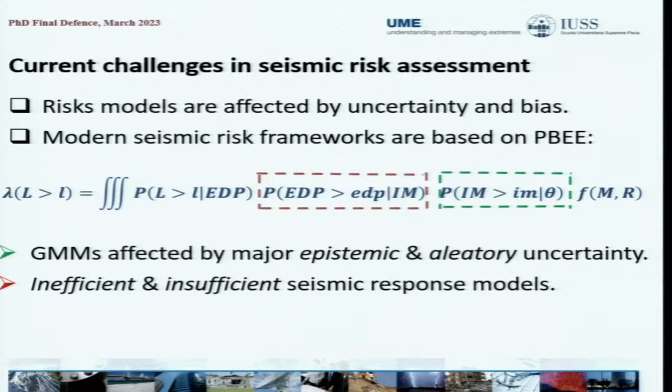To compare the observed with the estimated losses, and what we see here is a significant scatter. Now, modern seismic risk frameworks are based on performance-based earthquake engineering principles, which essentially use intermediate variables from the ground motion to the response in estimating the losses. However, in general, ground motion models are affected by major aleatory and epistemic uncertainty, and seismic response models, which are used within the vulnerability component, tend to be inefficient and insufficient.

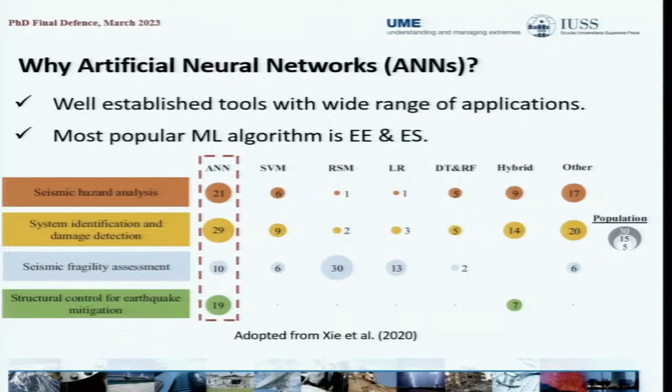Recently, data-driven machine learning models have shown promising advances in earthquake engineering and engineering seismology, as we can see from this study, in 4 main fields. The reason for this is that they can detect non-linear behavior in large data sets, and they are independent from predefined functional forms. Why did we choose neural networks? Because they are very well established tools with a wide range of applications, and according to the same study, they are the most popular tools in both earthquake engineering and engineering seismology. Moreover, they are not a black box, which means we can explicitly and precisely understand how they are trained and how they work, and we can express them in a mathematical form.

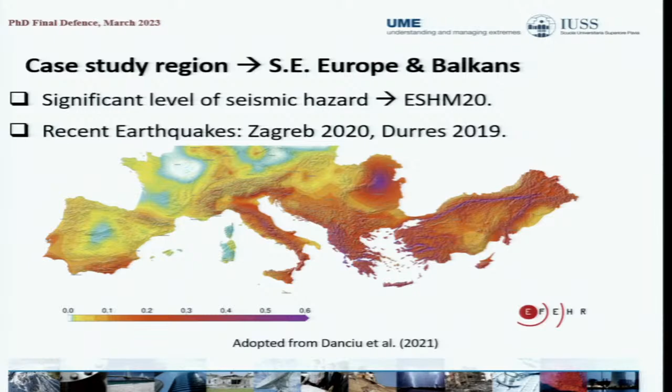Now, as a case study region, we are focusing on Southeastern Europe and mainly the Balkans, which is a region affected by significant levels of seismic hazard and, as a consequence, high levels of seismic risk. Allow us to ask the question: how can we improve existing methodologies in vulnerability modeling using neural networks? Traditionally, vulnerability models are scalar, which means they use one single intensity measure, and the most common case is the spectral acceleration at the fundamental period. Recently, advanced modern scalar intensity measures like average SA have shown some promising advances. However, there are still issues remaining, especially with sufficiency, which we will see soon.

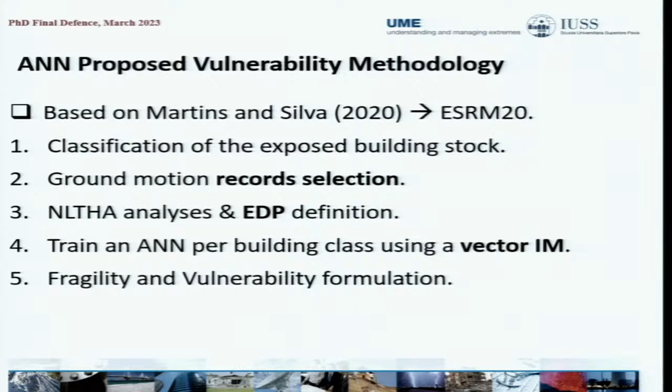Our proposed methodology is based on the methodology by Martins and Silva in 2020, which is also used by the recently published European seismic risk model, and can be summarized in these 5 steps, which we will go through one by one. In order to classify the building stock and estimate the structural capacity, we use directly the European exposure model, which classifies the building stock into building classes according to a set of common structural attributes and defines one median capacity curve.

Regarding ground motion selection, we used all of the strong records from the European strong motion database. However, we noticed there was a lack of very strong motions, which in typical vulnerability modeling studies is handled by scaling records to higher intensity conditioned on a single IM. In our case, since we are employing vector models, we couldn't scale because we are using many intensity measures. So for this reason, we used two subsets from the NGA West 2 and K-NET with very strong motions. Now, we performed non-linear time history analysis on single degree of freedom systems using VMTK and OpenSees, and as an EDP, we selected the maximum displacement.

Now, in order to train the networks, we set up 3 main goals, objectives if you will: to maximize efficiency, which is measured by the dispersion of the predicted response conditional on the IMs; to satisfy sufficiency, which is the conditional independence of other properties of ground motion like magnitude and distance; and finally, also make sure that we use intensity measures that can be predicted by existing ground motion models.

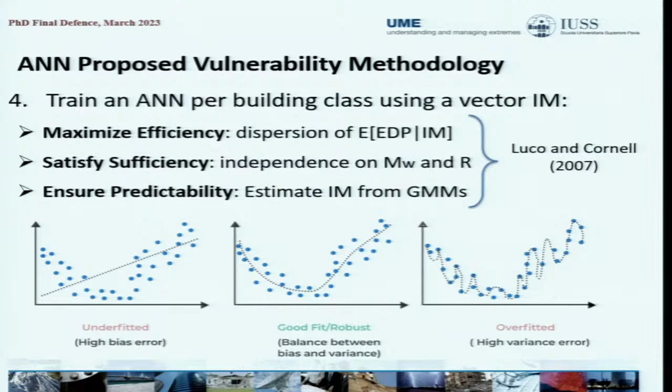Moreover, it is very important that we avoid overfitting and underfitting, which is a very common case for machine learning models, and aim for a good fit. In order to do this, we use the 10-fold cross validation, which essentially, for each building class, divides the entire dataset of intensity measures and EDPs into 10 equal subsets, and we train successively 10 neural networks using 9 folds for training and 1 fold for testing and assessing the model's performance on unseen data.

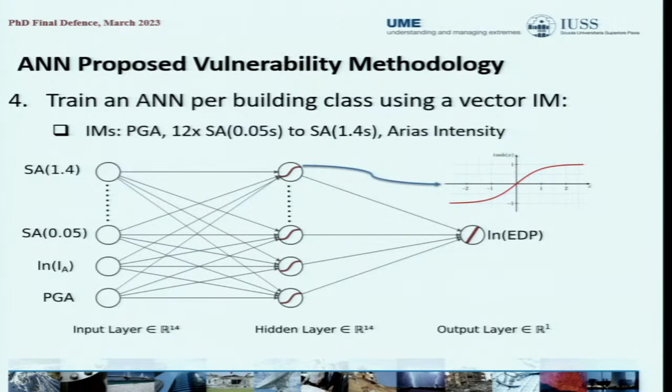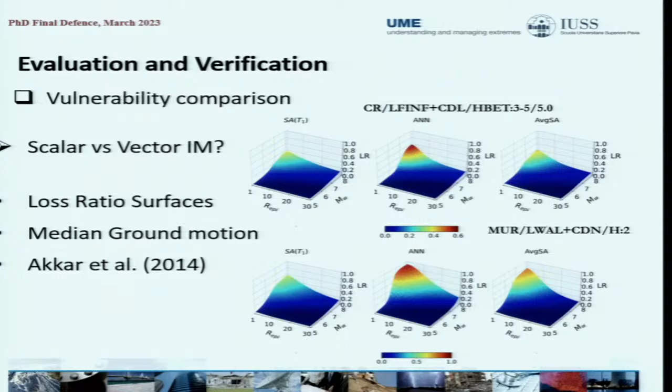In order to compare the variability between scalar and vector models, we employed loss ratio surfaces using the median ground motion from one ground motion model. And what we noticed is that in all cases, neural networks actually predicted higher loss ratio for combinations of high magnitude and short distance. And we can also verify this from these figures. The reason for this is that the scalar models, because they are less efficient, are affected by higher record-to-record variability, which tends to produce flatter fragility and vulnerability curves, which means underestimating the loss for high ground shaking and overestimating the loss for low ground shaking.

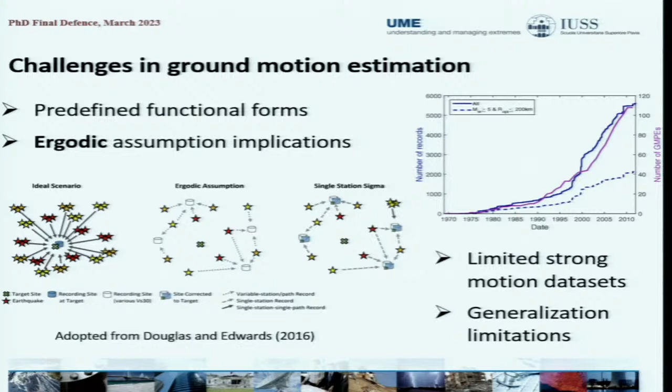Now, what about ground motion modeling and how can we employ neural networks? Traditionally, common ground motion models are developed using predefined functional forms on limited strong motion datasets. And these two facts, along with the ergodic assumption, have serious limitations and implications.

the mixed effects modeling approach, which is a very standard case when developing ground motion models. In this process, we have the fixed effect terms, which in our case is the median prediction by the neural network, and we have random effect terms representing the aleatory variability of the ground motion model, partitioned into three terms: between event, between site, and residual terms. We adapted actually a very recent algorithm for machine learning models that relies on likelihood maximization.

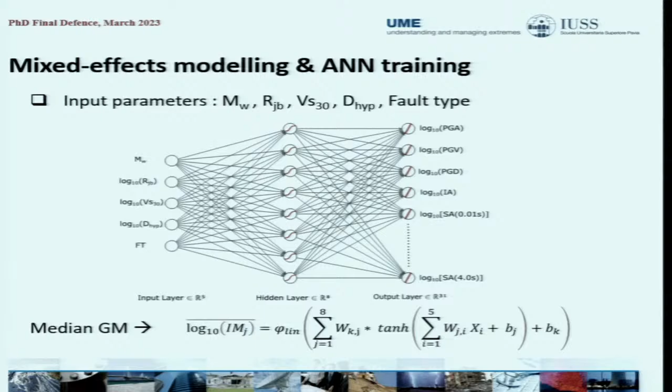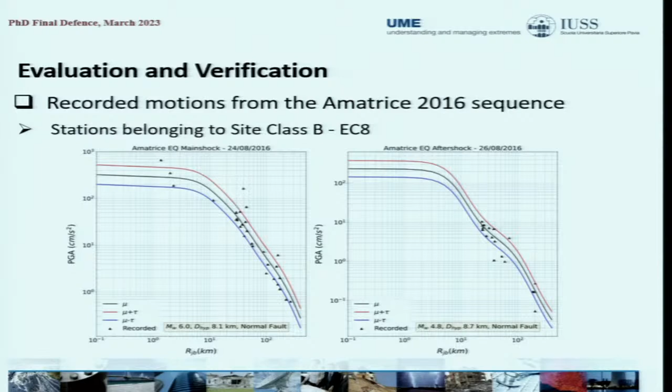Regarding the evaluation and the verification, allow us to use 2 very common intensity measures used in the vulnerability studies, SA03 and 1, representing low-rise and high-rise response of buildings. And what we can see is that the model is able to predict both in the entire range of seismic intensities with a very good accuracy. Now, we also compared the model's predictions with past seismic events that we have enough data. In this case, we see the median prediction of the model plus minus 1 between event-only standard deviation for the main shock and one aftershock in the 2016 Amatrice sequence, and overall we observe a very good fit.

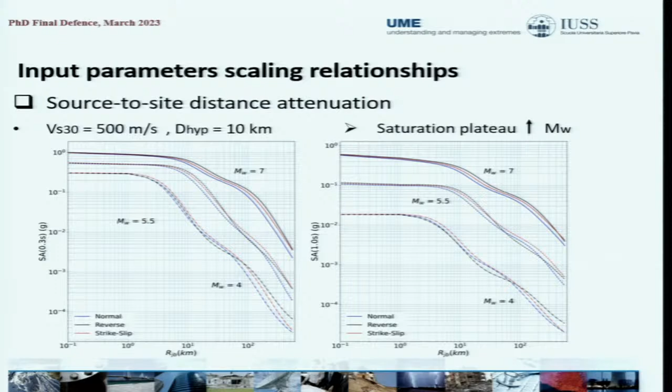Regarding the source-to-site distance attenuation, the model was able to capture that near-source ground motion saturates at shorter distances. And this saturation plateau increases with magnitude. Regarding the VS30 site amplification, there are two important things to note here: longer period spectral acceleration scales more with lower VS30, which is what we expected to see, and this scaling increases with distance.

Now, finally, we also studied the random effect terms and their associated variabilities and how they vary with structural period. There are two very important things here to note. First, we notice a significant between event variability, and this is a direct impact effect, if you will, of the ergodic assumption. And in our case, this is even more profound because of the high spatial distribution of events that we consider. And second, we noticed very similar trends with recently developed advanced ground motion models. The results of this chapter have been published in Bulletin of Earthquake Engineering.

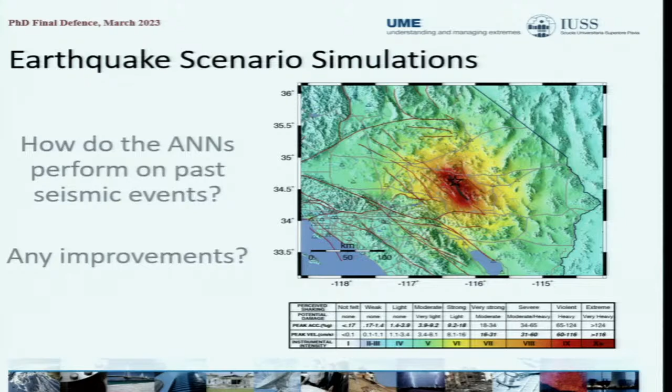Now, let's see how do the models perform on earthquake scenario simulations using damage and loss data from past events, and if we manage to have any improvements. We developed a seismic risk framework under which we defined 5 alternative modeling cases. Case A is using the USGS ShakeMaps to estimate the seismic demand, and using scalar fragility and vulnerability models directly adopted from the recent European seismic risk model. Case B, using GMPs, we consider 3

if the estimates are plus minus 25% of what was observed, overestimation higher than 25 and underestimation lower than 25. In our framework, we used certain components of the OpenQuake engine, specifically related to rupture modeling, and we used the exact same assumption for all events and all cases, 1,000 simulations for each event, and using the interperiod correlation model from Baker 2007.

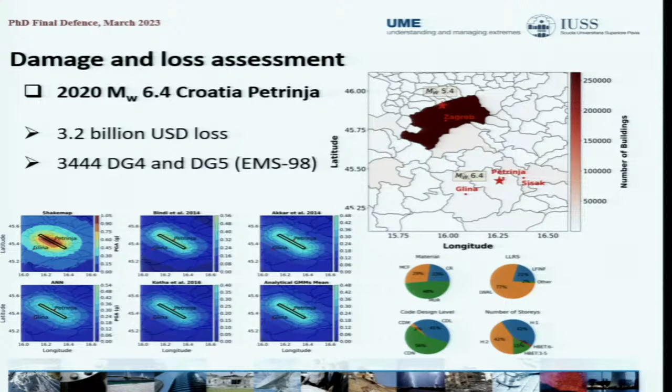The next event is another event in Croatia within the same year, in 2020, with magnitude 6.4. This event caused significantly higher ground shaking and around $3.2 billion losses. From the results of this event, we see a very clear trend that only modeling cases D and E, which employ the neural networks for the fragility and vulnerability components, were able to provide good estimates.

The next event is the magnitude 6 event that occurred in Athens in 1999, which at the time caused $3 billion losses. And in this case, we see the exact same trend that we saw from the previous event, that only cases D and E were able to provide better estimates, while the remaining cases in general overestimated the damage and loss.

Finally, we also considered one event that also occurred in Athens a few years ago that essentially did not cause any damage or loss, because it is important to assess the model's performance on such cases too. What we noticed here is that in general, most of the modeling cases significantly overestimated the damage and loss. Only 2 subcases from E that use the neural networks for the vulnerability were able to provide more reasonable estimates.

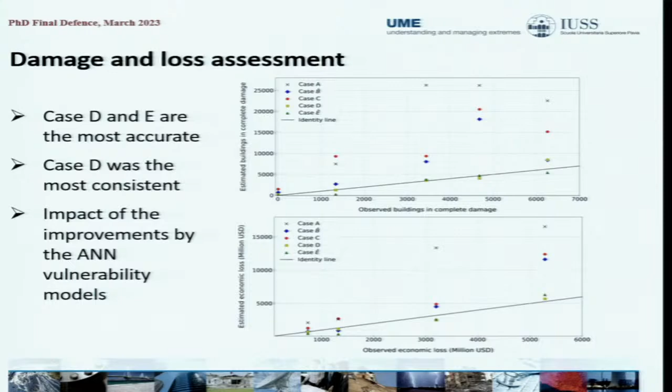Now, in order to summarize this, in these figures we see the 2 most important damage and loss metrics, which are the number of buildings in complete damage in the top figure and the total losses in the bottom figure. And what we see here is that cases D and E, which use the neural networks for fragility and vulnerability, were able to provide the best results, and specifically case D, which uses neural networks for both components, also for the ground motion.

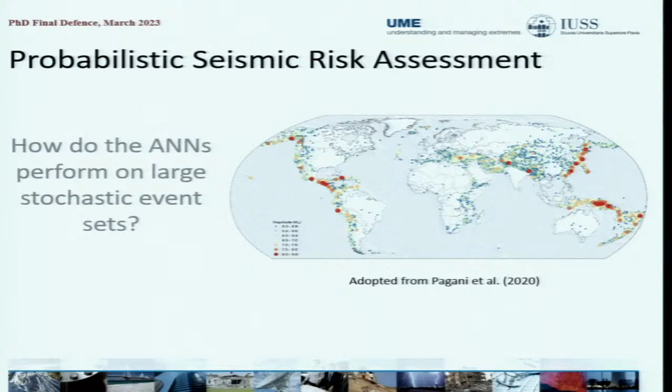Now, for the last part, let's see how the models perform on a large stochastic event set and carrying out probabilistic seismic risk assessment. The framework that was developed for the scenarios was extended to carry out event-based probabilistic seismic risk analysis, as you can see from this figure. The input data regarding the exposure, site, and source model were adopted directly from the European seismic risk model. And I have to mention that the generation of the stochastic event set was carried out in the OpenQuake engine and imported into our custom framework in order to estimate the damage and loss for each event.

Now, before we go into risk, we carried out the event-based PSHA for the cities of the highest exposure in the 3 countries of Albania, Croatia, and Greece. And we compared the results with the recent European seismic hazard model.

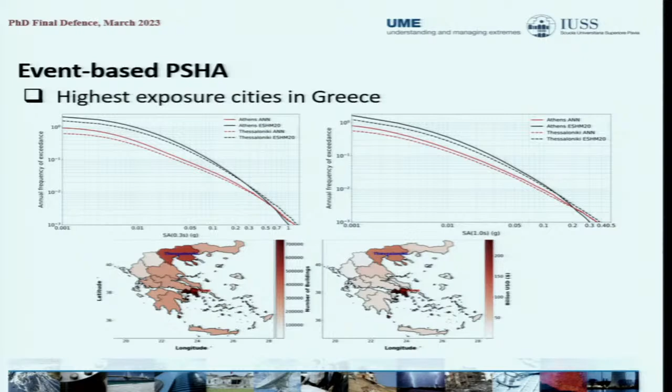What we noticed for the case of Albania and for the case of Croatia is that, in general, neural networks underestimated the hazard in the biggest cities of Zagreb, Split, Durrës, and Tirana. However, in the case of Greece, for moderate to low annual frequency of exceedances, what we notice is that the neural network predicted higher seismic hazard, and we will see very soon why.

Now, in terms of risk, of course, this difference that we observe in the hazard was also reflected here. We compare our results with the European seismic risk model in terms of average annual losses and loss exceedance curves. And in all cases, here for Albania and here for Croatia, we observe that the spatial distribution of losses is almost identical with the European model. There is in general a big underestimation of the losses. However, for the case of Greece, we notice that both models predict similar average annual losses.

And this holds for a big range of the loss exceedance curves. However, for intermediate to long return periods, the neural network framework predicts higher losses.

And in order to understand this, we investigated which events from the stochastic event set contributed more in this part of the return periods, and we noticed that there are events with magnitudes and depths outside of the range of the input parameters used to train the neural network ground motion model. And this should be highlighted: these models should never be used for scenarios and cases where they are outside of the data used to train the model.

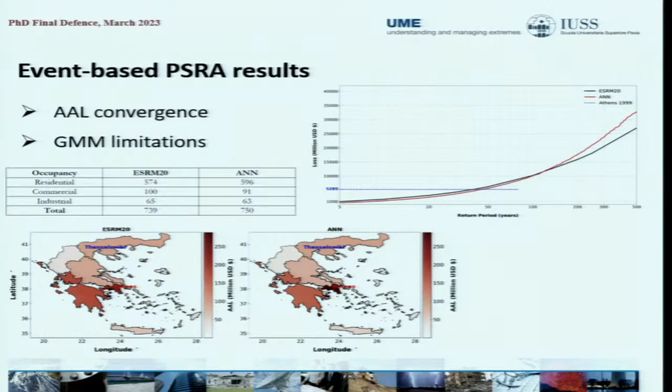Now, in order to summarize, in the vulnerability modeling, we noticed that neural networks are consistently sufficient in all cases and significantly more efficient than the scalar models. Although it is important to mention that average SA performed better than SA(T1). Neural networks were able to substantially reduce the bias and uncertainty in loss estimation. However, we should always keep in mind that scalar models have been calibrated and maintained for decades, and in order to start using neural networks, more work is required regarding validation and verification.

Now, regarding ground motion modeling, we noticed that our model was in very good agreement with past seismic events. And it is very important to note that the model was able to provide scaling and attenuation relationships which revealed physically sound trends, which is something very important. However, due to the high spatial distribution of considered events, we noticed a very high between-event variability, and this is a direct effect of the ergodic assumption. That's why future studies should focus on using neural network and machine learning models to develop fully or partially non-ergodic ground motion models.

Regarding the earthquake simulations, one important thing to mention that I did not mention before is that the selection of the ground motion model to estimate the seismic demand has a significant impact on the mean damage and loss metrics. It's something that has been observed by other studies, of course. The best performing cases were cases D and E, specifically case D, which both employ the neural networks for the vulnerability and fragility component, and case D also for the hazard estimation. And although neural networks were able to provide better mean estimates, we did not manage to reduce the major variability of the damage and loss estimate because this originates almost entirely from the aleatory uncertainty of the ground motion models.

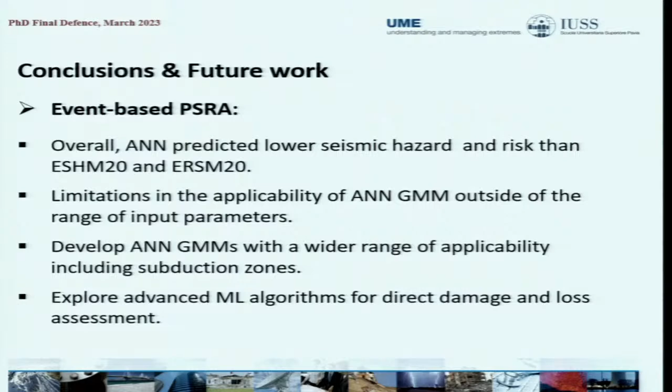And finally, we believe that it's very important that future work should also explore alternative and recent machine learning models for carrying out direct damage and loss assessment without the need of estimating ground motion fields. And we should never forget that all models are wrong, but some are useful.

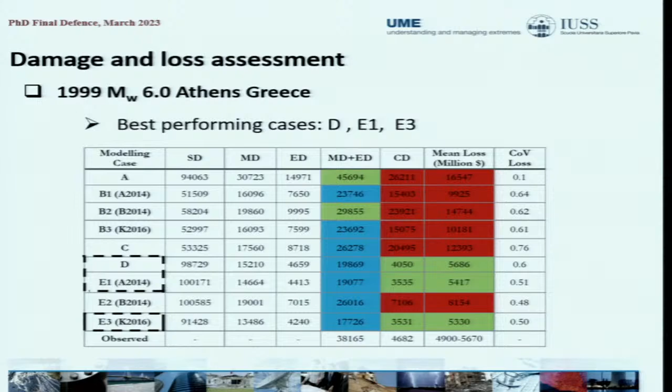Are there other questions from the committee? In view of structures, can you give me more details about the method to define the classes of buildings and how the criteria can change the reliability of the method?

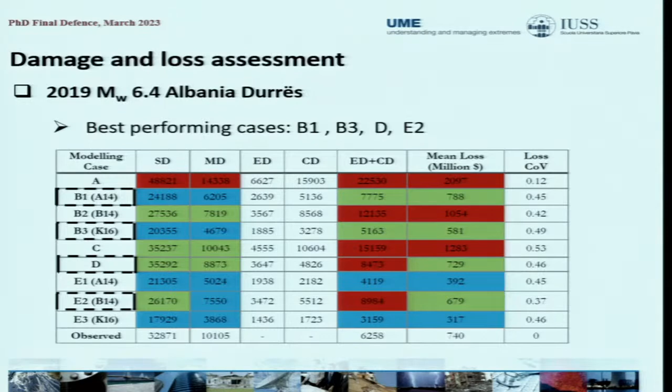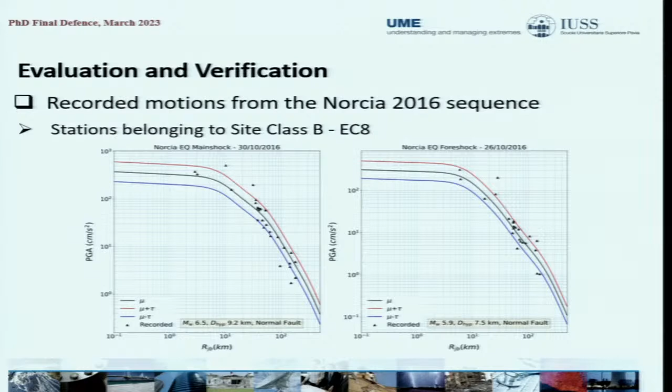We did not develop any building classes, we adopted directly the building classes and corresponding structural capacity models from the recently published European seismic risk model. As you can see, if I can manage to go very far back, for each building class, which is defined by a common set of structural attributes, the European seismic risk model using the GEM building taxonomy defines a median structural capacity curve. There are many slides, but essentially we did not provide any novelty within this thesis. We just used the most recently publicly available models. Thank you for your question.

Other questions? Fulvio. A question about the record selection, because you showed us that you also consider very small site-to-source distances. Did you also take into account pulse-like ground motions, or do you expect to include them in a future work?

Very good question. Well, I believe that if you want to estimate the risk of a single building or a single facility, this is very important. But in our case, as you can see here, we used more than 3,000 records in order to cover a very large region in the Balkans, considering so many building typologies. I'm not really sure how this would change the actual median and mean prediction of the vulnerability models. I think it is very important when you are interested in one facility, but I'm not really sure. Actually, I believe that it would not change how the neural networks train and develop. Thank you very much for the question.

Okay. Have time for that. Okay, we have a question. Maybe, because you need to grab the mic, Rui. We only have one.

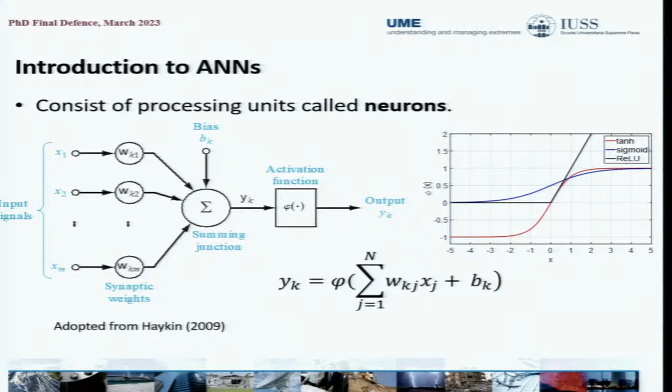They are trained very well. Actually, the reason we use them is that we can really understand how they are trained, and they are trained very efficiently using the backpropagation algorithm. Essentially, you do this training in many loops where you pass the data and have a loss function and a specific loss metric that you try to minimize using first and second order derivatives, but coming backwards, from the outputs back to the input parameters. I believe this is the main reason we use them: we can understand how they perform linearly, we know exactly when they do the nonlinear transformation, and we have tools in libraries to train them well with an established backpropagation algorithm.

I hope I answered both questions. Okay, thank you, Rudy. It has to be really, really quick, Enes, okay?

I have a quick question. Based on your experience with artificial neural networks, how hard or how much work would it be to consider spatial variability, cross correlation between different points on different sites, how ground motions are correlated? In addition, I saw that for considering correlation between different spectral accelerations at different periods, you use the model from Baker 2007 for both spatial correlation and cross correlation. Does it need a lot of work to implement this within your methodology? Thank you.

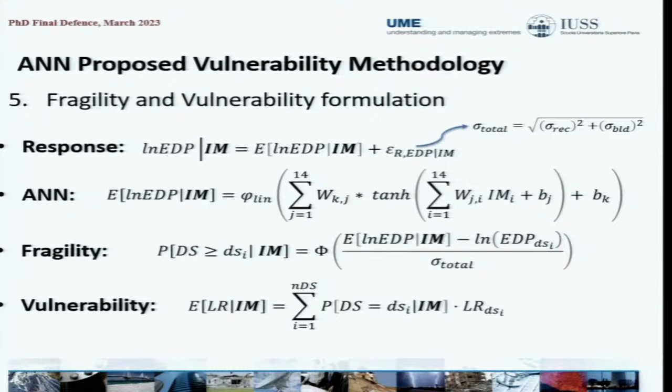Regarding the inter-period correlation, it does not increase the cost at all. Actually it's very easy to implement, and it does not increase the running time of the analysis. The problem comes when you want to include spatial cross correlation, because the neural networks we used here employ 14 intensity measures, so imagine the burden when you have more locations with buildings where you want to estimate damage and loss, and 14 intensity measures—this creates exponentially large cost. Compared to scalar models, this is one area where we notice some difficulties, but it can definitely be done. It's not a problem.

Yes. Well, thank you again, Petros. Thank you very much.

Move now to the next candidate, Derek Rodriguez Pacheco, who will be presenting us his work on developing a framework for the quantification of non-structural seismic performance factors. Derek is from Costa Rica.

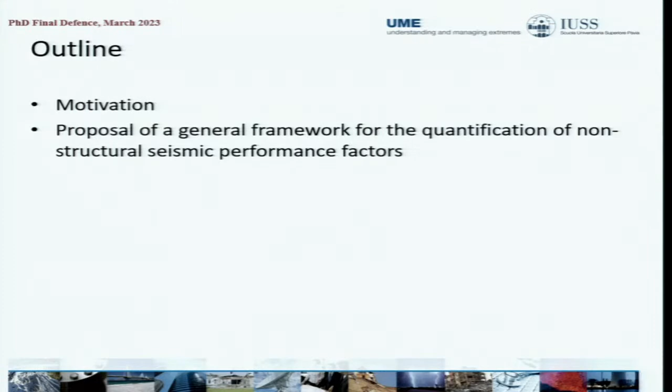Then, based on some literature review that we performed in the beginning, basically we did an initial proposal of a framework for the quantification of non-structural performance factors in order to try to find the research gaps that needed to be filled during this dissertation in order to more or less fulfill the idea we had in the beginning. Based on this initial proposal, 3 different topics were determined that needed to be further investigated. The first one corresponded on how to characterize the duration of floor motions.

Okay, I don't know. Quick. Okay, sorry for that.

So the first thing that we identified was to find a way to characterize the duration of floor accelerograms, because it was something that still was not investigated so far before we started working on this. The second one was how to estimate floor response spectra for large building populations, which also was a kind of a tricky topic that had not been very much looked into before we started. So we also developed some research in this area. And finally, the biggest gap to fill, in my opinion, was to find a way to simulate synthetic floor accelerograms in order to assess the performance of non-structural components.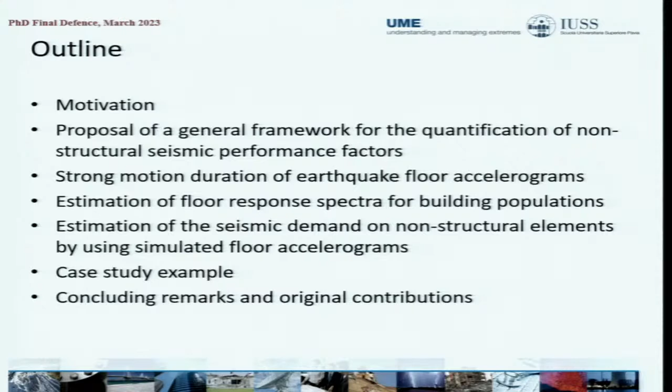After this, basically we implemented a case study example in which we encompassed all the investigation and all the research we conducted in order to demonstrate how the framework we proposed could be used eventually for the quantification of non-structural performance factors. And just to finish, I'm going to talk about the main contributions we think this dissertation provides to the current state of the art, and also the future work that can be done regarding this topic.

So, with respect to the motivation, basically, as many of you know here, non-structural components started to play a substantial role in our field, more or less, I would say, a couple of decades ago, as a consequence of mainly 2 things. The first one being the development of the performance-based earthquake engineering in the United States. And second of all, also because of the outcome of several seismic events that occurred in very densely populated areas which had strong code regulations.

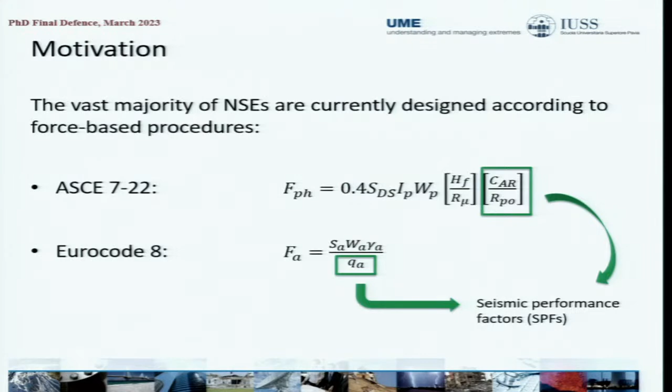So, nowadays, the vast majority of non-structural components are designed according to force-based design procedures, which basically use what are called the seismic performance factors in order to correlate non-structural behavior and non-linear behavior with elastic analyses that are typically used by practitioners around the world. For the case, for example, of the ASCE 7-22 in the United States, we have that the performance factors are the CAR and the Rpo, where in the Eurocode the famous behavior factor q is the corresponding seismic performance factor. Important to mention also that for the Norme Tecniche per le Costruzioni in Italy, the same equation as the Eurocode is used, but with the exception that no importance factor is considered.

So, unfortunately, the main problem we have nowadays is that for non-structural systems, all of these factors are mainly based on engineering judgment, which means that we don't really know how reliable they are. I mean, we don't even know if we're designing our components properly because these factors have not been calibrated to follow specific performance objectives.

There are other design philosophies that have been developed during the last years. For example, the displacement-based design philosophy that is very common here in Pavia as well. However, the main issue we have is that even though the high development that DBD has experienced during the last decades, it has unfortunately not found its way inside code provisions, which means that still nowadays, basically the vast majority of the modern seismic design provisions still use force-based design procedures.

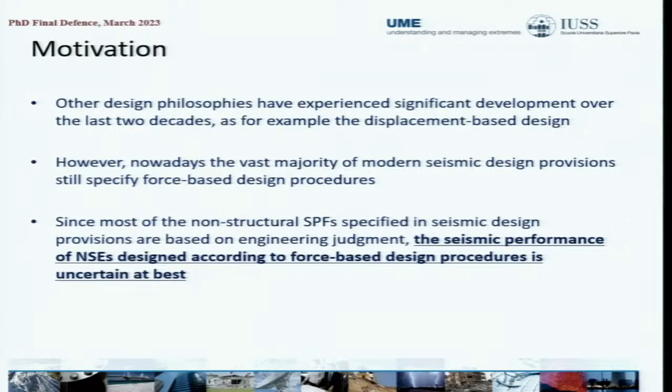And because we already saw that these procedures depend on these factors that are basically based on engineering judgment, it means that the performance of non-structural systems designed according to them is uncertain at best. We don't know how they're going to perform under future events because basically they're designing by using equations that have not been calibrated. This means that in order to improve the performance of these components, it is a must to improve the current force design procedures, because they are the ones still being used, and it's not likely to change in the short or mid-term.

In the case of structural systems in the United States, the FEMA P695 methodology exists, which is basically a comprehensive, scientifically based methodology that shows you how to calibrate and quantify these performance factors for structural systems. Unfortunately, for the case of non-structural components, no such robust methodology exists yet. So the main objective of this thesis is right here. It was basically to find a way to propose a framework analogous to the FEMA P695, but for non-structural systems, in order to at least set the rules about how these factors should be calibrated in the future.

In order to start, based on literature review and a revision of the FEMA P695, an initial proposal was made based on this methodology for non-structural components, with the main difference that an additional phase was included in comparison to that of the FEMA P695, the one you see highlighted in green there, which is entitled Establish Seismic Demand. The main difference between the performance assessment of non-structural components and structural systems is that the demand on non-structural components highly depends on the dynamic characteristics of the supporting structures, which means that we have an additional layer of uncertainty and of analysis that needs to be conducted in order to assess the performance of these systems.

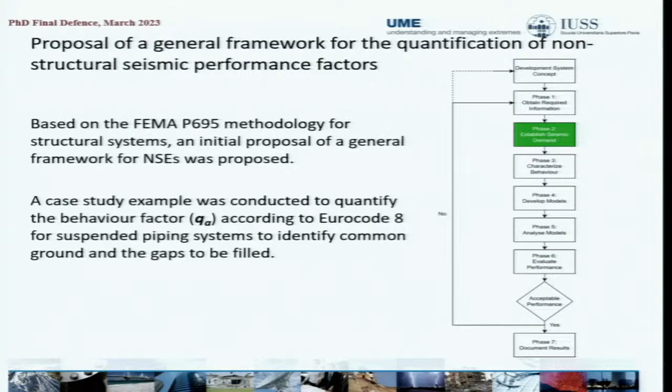In order to make an initial assessment of the feasibility of this initial proposal, we did a quick case study example in order to quantify the behavior factor according to Eurocode for suspended piping restraint installations. In order to do this case study, a population of 100 code-compliant reinforced concrete frames was considered, designed according to Eurocode for a medium to high seismicity zone in Europe. Two performance objectives were selected, which were damage limitation of the non-structural components and life safety. And in here you see also an example of the type of restraints that I'm talking about, which are transverse trapezes that help to sustain the seismic loads from these systems during an earthquake. And the numerical models were calibrated based on experimental campaigns conducted by Perrone et al.

After performing this case study, it was determined that the implementation was actually very feasible. This framework was able to take into account the main sources that affect the performance of non-structural components and also the main sources of uncertainties. However, we identified a big obstacle, and that was that the phase that was being proposed, the new phase, the seismic demand estimation, can make the process unfeasible in some cases, because depending on the size of the target building population and the set performance objectives, the process can become unfeasible from a computational overhead point of view.

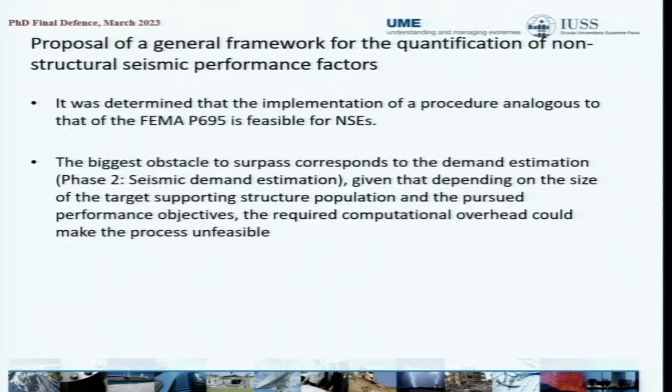Because, just to give an example, if we have 100 buildings and we have 9 return periods we want to assess, and we have 20 ground motions selected for each of these return periods, we have right there 18,000 nonlinear time history analyses. Then you need to multiply this by the average number of stories of each building, then by the number of non-structural archetypes, and you can see that things can get out of control very easily in terms of computational time. So in our experience, when we did all this analysis, this can take months, which was a big limitation where we had to find a way to deal with this.

So in here, basically, we came to a crossroads in which we said, okay, what should we do here? We could continue with this approach, which would maybe be very impractical, or we could find a way to develop a streamlined process to bypass this additional layer of analysis and uncertainty that we have.

And here is where the idea of using the simulation of floor motions came through. The main issue we found with this idea was that there was basically no literature available, at least publicly, on how to simulate this kind of floor motion, because a lot of research has been done during the last decade for ground motions, but for floor motions, there was nothing. So we identified three main things that needed to be dealt with in order to propose a way to simulate these motions.

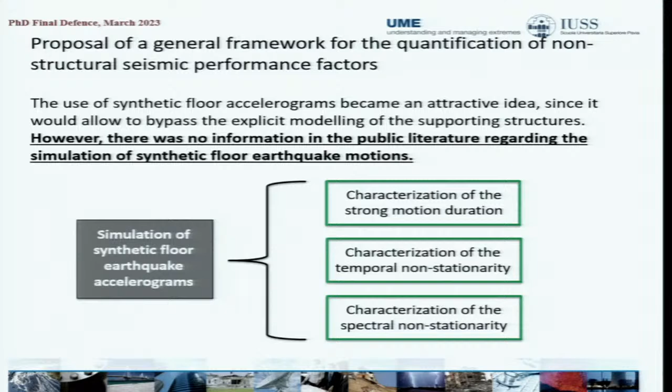One was a way to characterize the duration of these motions. The second one was a way to characterize how much the amplitude changes with time, which is what is called in seismology the temporal non-stationarity of the signal. And then we also have how much the frequency content varies with time, which is what is called the spectral non-stationarity.

So in order to deal with the first of these issues, we conducted a study to characterize the duration of floor accelerograms in the target building archetypes, which were reinforced concrete frames designed for a medium to high seismicity zone in Europe. We basically used the Arias intensity model developed by seismologists to characterize the duration of ground motions, but adapted for the structures.

In addition to this, we established a new parameter called the strong motion duration ratio, which is the ratio of the strong floor motion duration of each story with respect to its corresponding strong ground motion duration. So here you see an example of the calculation we have for each of the stories of the building. We compute the duration based on the Arias intensity. After that, we compute the ratios with respect to the ground motion in order to determine this strong motion duration ratio.

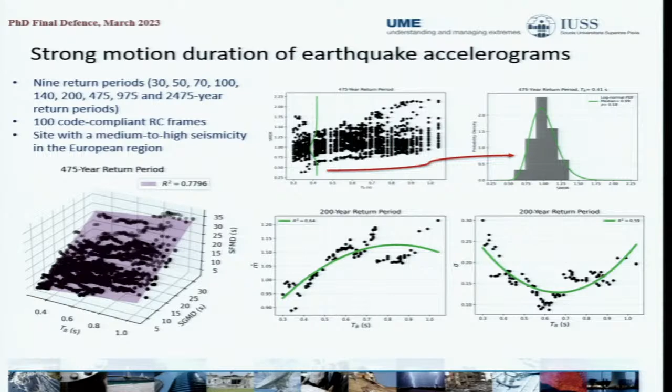Based on this, regression analyses were conducted for all the return periods, for the buildings that were analyzed and all of the ground motions selected for these hazard intensity measures. Basically, a probabilistic model was proposed that was able to estimate a lognormal median and standard deviation that depends on the fundamental period of the structure, on the hazard intensity level, and on the corresponding strong ground motion duration of the ground motion.

The next step that we needed to account for was how to estimate floor response spectra for large building populations, which was also another of the limitations of the study. There have been several methods proposed during the last decades, but the issue we had is that most of them were developed for specific buildings, not for building populations.

The main issue with this is that most of these methods, in order to take into account the nonlinear behavior of the supporting structure, need to have as an input the nonlinear material and geometric properties of the structure. In the case of building populations that can be very large, sometimes that is unfeasible, or you could have the information, but implementing it is just a big limitation.

So we developed a way to account for the influence of the nonlinear behavior, which are basically the two effects that you see in this plot. One of the effects is the lengthening of the vibration periods of the structure, while the other one is the capping of the spectral acceleration. And we did this by proposing two sets of factors, the first one being the R factors, and in that figure you see an example of these factors for the first mode of a given structure.

The R factors take into account the capping of the spectral acceleration due to the limited capacity of the supporting structure, while the delta T1 estimates the lengthening of the period based on the spectral shape of the floor response spectra. And these factors were based on the displacement ductility demand, because that was the parameter we found the most adequate, because it basically gives you an estimate of how much

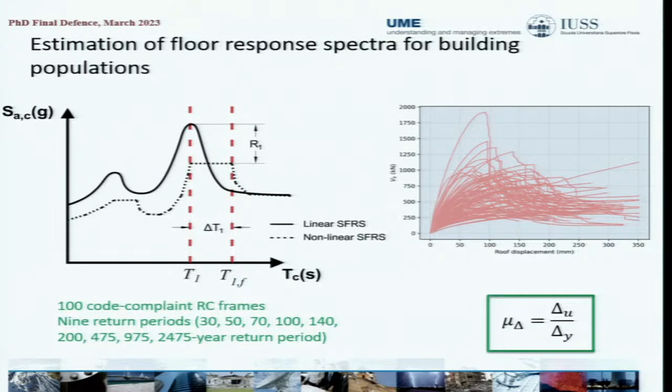And an important thing to mention here is that we did all these factors just for the first two modes of the supporting structure, because the main scope of this method was to be used in regular supporting structures, which are heavily dominated by the first modes.

Now, with respect to the phase that we propose to add in this framework based on the FEMA P695, okay, we proposed the phase, but we need to explain how this phase must be developed. So we came up with this sub-process in order to estimate seismic demand in a standardized way.

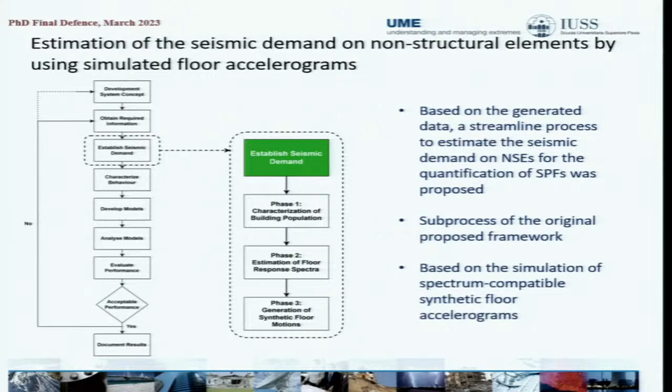We're proposing to divide this sub-process into three phases. The first one is the characterization of the building population. The second one is the estimation of the floor response spectra. And the last one is the simulation of the synthetic floor motions. For the first phase, what was proposed was to fit a probability distribution to the fundamental periods of the target building population, in order to obtain characteristic periods by dividing the probability density function of the fundamental periods into equal probability parts. In this way, you can obtain characteristic periods that more or less describe the variability of the complete building population.

The second step was to estimate the floor response spectra. This was done initially assuming an elastic behavior of the supporting structure, by using the method proposed by Merino et al., with a small modification: in order to compute the dynamic properties of each of the structures, the coupled flexural beam shear beam system proposed by Miranda and Taghavi was used.

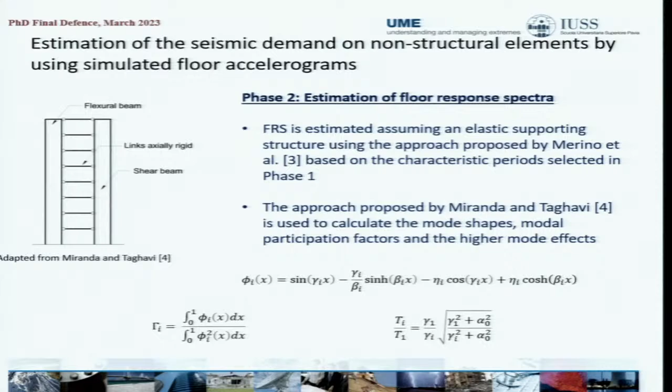The last phase was how to simulate the synthetic motions. Here, the first thing that we had to consider was that the floor motions differ deeply in their spectral properties with respect to ground motions because of their filtered nature. Floor motions are filtered by the supporting structure, and this changes completely the spectral characteristics of the signals.

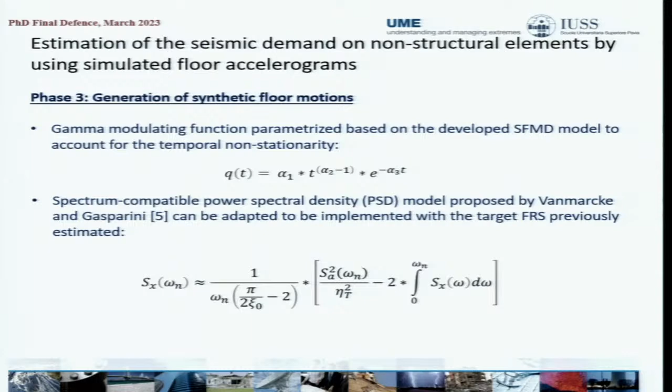And the last thing we have to consider is how to model the spectral non-stationarity of the signals. This is a topic that still needs more research and is pending in the field mainly for two reasons. The first one is that what is usually done in ground motions is that this effect is considered by using filters that are calibrated based on physical properties of ground motions, parameterized based on large statistical analysis of a lot of data sets. This sort of information is still not available for non-structural components, partly because of the just recent interest in the field on non-structural components, but also because since the demand of non-structural components depends on the dynamic characteristics of the supporting structures, performing such a statistical analysis will be much more complex than the case for structural systems.

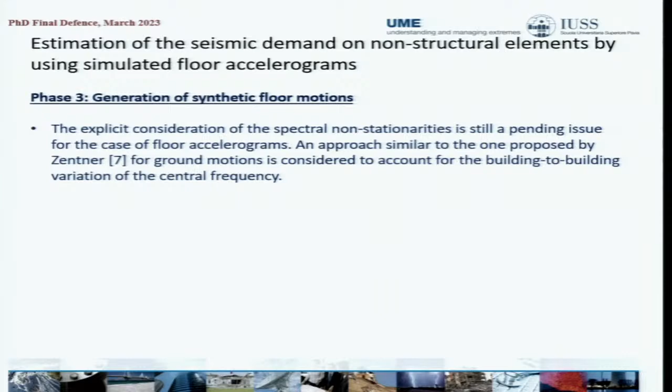So what we did in this case is that we considered an approach similar to the one proposed by Zentner in 2014, in which we took the distribution of fundamental periods that we estimated by probability distribution in the beginning to simulate motions according to these different characteristic periods. This allows us to consider the building-to-building variation of center frequency, which is in fact the main parameter that affects the most the frequency content of these floor motion signals. So even though the change in time of the frequency content is not explicitly modeled, the main effect of it is taken into account.

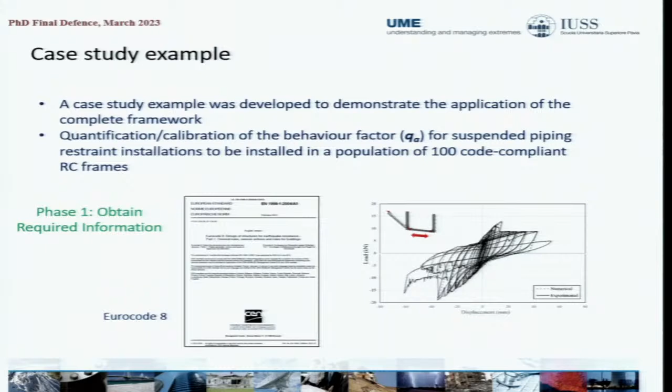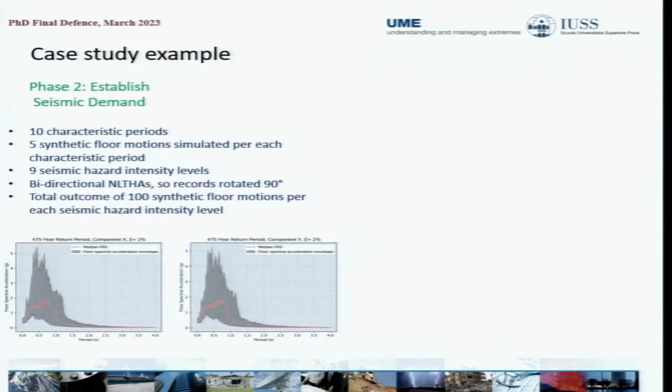In order to demonstrate the whole application of the proposed framework with the newly developed procedure for the estimation of the demand, a case study example was conducted to show how the whole procedure can be applied. For phase one, the requirements were used, and the experimental data from Perrone et al. was also used to quantify the performance of suspended piping restraint installations. Then the seismic demand was estimated based on the proposed procedure by using simulated synthetic floor accelerograms. Then the behavior was characterized by selecting 8 different archetypes with a layout similar to the one shown in this figure, which consisted of a main line and a cross main line, by using two types of suspended piping restraint installations that were transverse and longitudinal brace trapezes.

After this, we had the nonlinear model development, in which 3D nonlinear models were developed by using the open source platform OpenSeesPy. Here you can see an example of one of the mode shapes of the selected archetypes, with a summary of the design of all the archetypes considered.

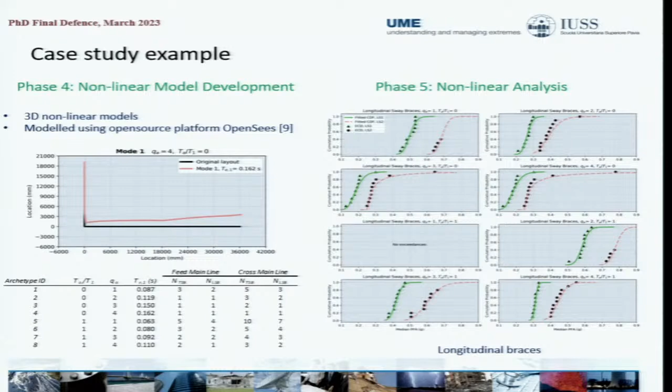Then phase 5 was the conduction of the nonlinear analysis and the derivation of the fragility curves, in which the fragility curves were derived independently for both the longitudinal braces and the transverse braces. In this case, we see the sample of the longitudinal braces.

And finally, we have the performance evaluation, in which a procedure analogous to that of FEMA P695 was considered, by adjusting the fragility curves to take into account additional sources of uncertainty than the ones explicitly considered in the derivation of the fragility curves. Based on this, a final evaluation was made of the behavior factor, and it was determined that for the

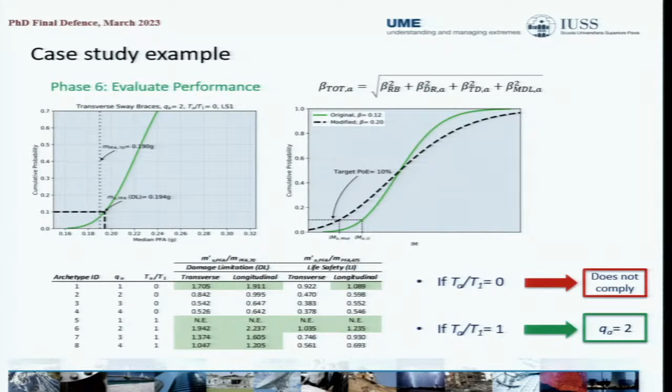two different assumptions and scenarios that Eurocode 8 provides, that are basically the case of resonance between the non-structural system and the supporting structure, and the case of a very rigid non-structural component, for one of them, for the case of the ratio considered, it was not possible to comply with the two selected performance objectives, which can be interpreted that the current design provisions of Eurocode 8 could need improvement, maybe.

As concluding remarks, we determined six main contributions that this dissertation provides to the current state of the art. The first one was the development of the first framework for the quantification of non-structural seismic performance factors. The second one, we also developed the first probabilistic model to describe the duration of floor motions. That has not been done before we started working on this topic.

The third one was the development of a method to estimate floor response spectra for large building populations, which can be used in a variety of cases and applications different to the ones used in this thesis. Four, we have the first procedure to simulate synthetic floor accelerograms based on the temporal non-stationarities and the building-to-building variation of central frequency. And the last two are the development of a computationally efficient procedure to estimate the seismic demand for the performance assessment of non-structural components, and the implementation of the proposed framework in a case study example in order to demonstrate how these factors can be calibrated and quantified for non-structural systems.

With regards to the publications, the outcome of this thesis was 6 publications, 3 journal papers and 3 conference papers, which you see listed in here. The first 4 are here, while the remaining 2 are in the following slide. There is 1 additional publication and 1 additional journal paper that will be submitted somewhere around this year, which will be the 7th contribution of this dissertation.

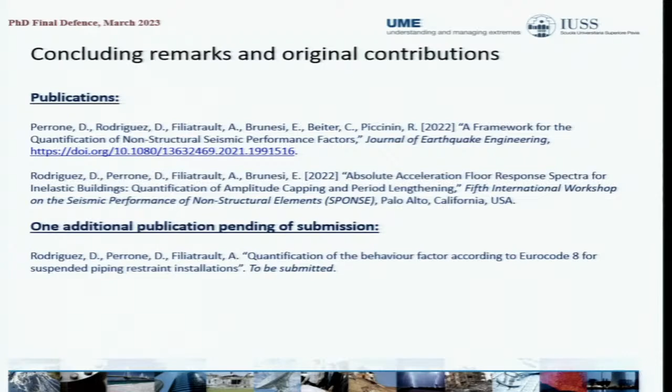And to finish, about the future work, there are 4 different points in which we think this research could be continued. The first one will be to actually use the framework to quantify seismic performance factors to be included in seismic design provisions in order to improve our design for non-structural components. The second one will be to expand the floor motion duration model developed to other zones with different seismogenic characteristics and different characteristics of buildings, or seismic force resisting systems.

The third one is to investigate how the explicit consideration of the spectral non-stationarities will affect the performance of non-structural components or not. We don't know if the consideration of this aspect explicitly will have a huge influence or not on the performance of non-structural components. And finally, the implementation of the proposed procedure within this dissertation for the estimation of the seismic demand in other uses, as for example, cases in which large building populations need to be considered, such as regional studies and loss estimation studies, in which there are still a lot of gaps to be filled regarding how to treat the behavior of non-structural components.

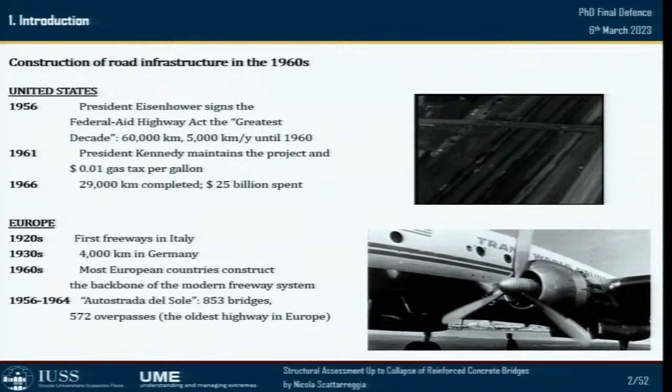So, around the world, the age of existing bridges is about 50 years. This is due to the fact that the backbone of road infrastructures was built during the 60s. This was the case of the United States as well as of many European countries, among which Italy, where during this period the Autostrada del Sole was built, which alone counts more than 1,000 bridges.

But what about the causes of collapses of bridges? Essentially, their collapse can be associated to several causes, among which we have unexpected external actions, associated to natural hazards like earthquakes and floods, or anthropogenic hazards like impacts. Another cause can be associated to deterioration in combination with the increase of traffic, especially in the last century. Another common cause is inadequate design and construction mistakes. However, as usual, the collapse of bridges is associated to a combination of multiple factors.

However, if we look at the available statistics from previous works, from a collection of collapses worldwide, as well as from just the US, we can see that natural hazard is the main cause for bridge collapses, and specifically flood and scour are the critical ones. On the other hand, the second most important cause is associated to impacts as well as construction and design mistakes. Another important piece of data is that the average age and mode age at collapse are 50 and 60 years old. That is well aligned with the typical design nominal life of bridges.

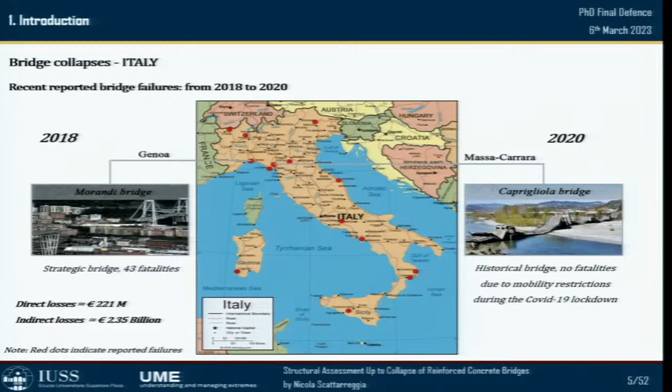And this was also the common age at collapse of bridges that were recorded in Italy in just a 2-year time frame, from the collapse of the Morandi Bridge in 2018 to the collapse of the Caprigliola Bridge. Just in 2 years, around 10 bridge failures were reported, the majority of which were associated again to hydrological factors. This is, of course, not surprising considering the geomorphology of Italy, where the whole territory is exposed to both landslide and flood hazard, as well as seismic, but for the seismic action not so many bridge collapses were reported. This is also why in Italy we count around 60,000 bridges.

And if we look more in detail at the stock of Italian bridges, we can see that almost 55% are 50 years old. This means that a significant fraction of existing bridges has reached or is reaching its nominal design life. So this means that they require assessment, repair, and upgrading. It is within such context that recent guidelines have also highlighted the need to assess the resistance and robustness of deteriorated bridges.

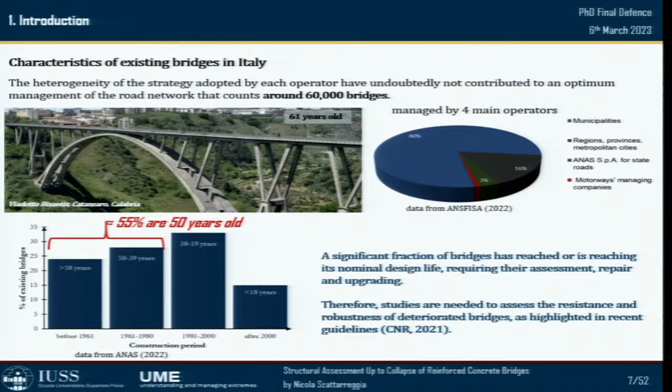And so it is within this need that structural assessment of bridges up to their collapse is very useful to understand the impact of hidden deficiencies as well as construction defects on their residual capacity as well as on their failure mechanism. In addition to this, it is also interesting to examine their response up to their collapse when subjected to undesigned loading scenarios as well as exceptional or extreme scenarios.

And in addition to that, of course, the structural assessment of bridges up to their collapse is very useful in case of forensic investigations and also to save cost in performing full-scale and on-field tests. And given these necessities, of course, we cannot make use of traditional continuum-based techniques like the finite element method because it is not an easy task to account for separation and collisions with these techniques. Whilst, on the other hand, discrete element approaches like, for instance, the distinct element method require a high computational time.

So it is for this reason that the applied element method has been selected as an innovative numerical method to analyze the structure response from the very initial elastic stage to collapse. And this was selected because it has been demonstrated that it is able to model the structure response, although at the beginning of these studies there were not so many applications to bridge engineering, especially for the assessment of large and complex reinforced concrete bridge structures. So how does the applied element method work?

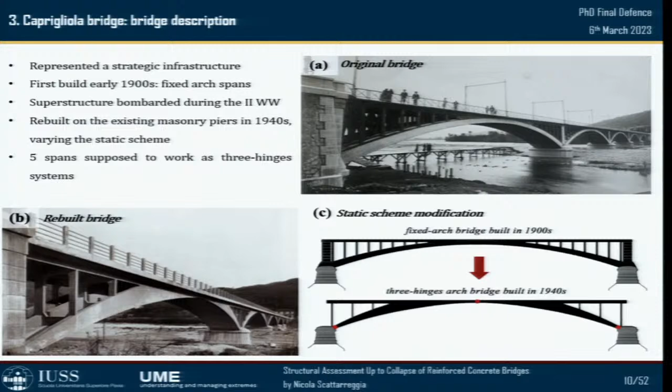So by making use of this numerical method, which was mainly used in the studies that were carried out, I had the chance to analyze two structural typologies, one of which was the multi-span arch bridge of Caprigliola. This was a historical and strategic bridge that was first built at the beginning of the last century. Then, unfortunately, similar to other bridges, it was bombed during the Second World War, and then it was rebuilt with a significant change, passing from the initial fixed arch solution to the three-hinged arch system.

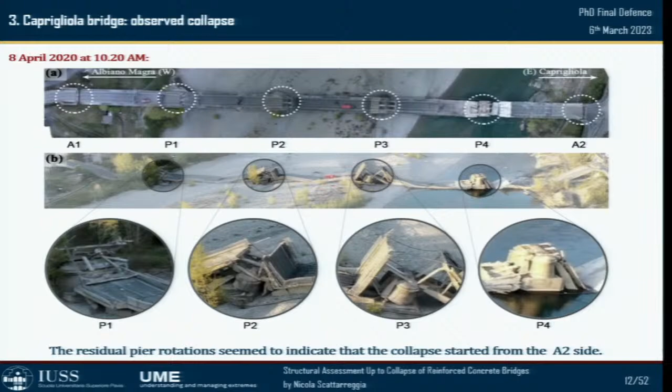It was in 2020 that the bridge collapsed, and by analyzing the debris, and specifically the residual rotations of piers, it can be understood that the collapse started from the Caprigliola side. Indeed, it can also be observed that due to the collapse of one of the spans, the bridge fully collapsed due to a domino effect. And so, based on the available information online and historical data from previous work, an applied element model was built that counts about 100,000 elements, where all structural details were explicitly reproduced, both for the geometry and for the reinforcement details.

The three main stages of construction were considered. And also a preliminary validation was carried out in the nonlinear range by isolating one rib of the bridge and performing push-down analysis, also using a model developed in the computer program VecTor2. And also in this case, at collapse, the peak resistances were well aligned.

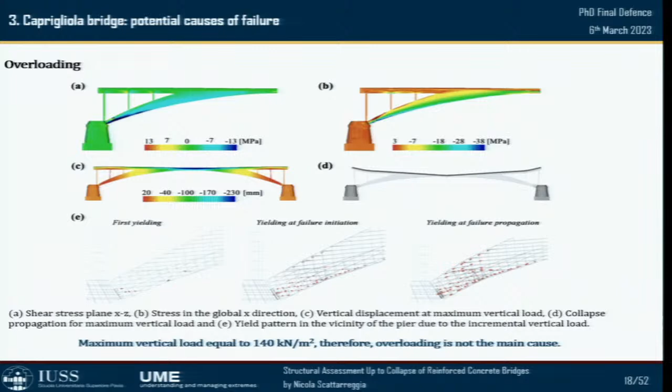Of course, first of all, I would like to introduce what was the effect of the additional slab that was built during the 90s. I observed that the construction of this new slab had led to an increase of stress in correspondence of the pier, in a section close to the pier arch connection. However, we then also performed a push-down analysis, and I realized that the residual capacity of the bridge was well above the one that we use today for design. And from a certain point of view, this was expected, considering the arch static scheme that mainly works under compression.

In addition to that, it was also explored the impact of material deterioration or imperfection on the residual capacity of the bridge, and it has been observed that only very high levels of deterioration would have compromised the static capacity of this bridge. And considering that also at the time of the collapse, just few vehicles were passing on the bridge due to the COVID-19 pandemic restrictions that were enforced at the time, certainly the overload can be excluded as the cause of the bridge collapse. Then, as I said before, I explored many other loading scenarios associated to vertical settlements, pier rotations, as well as a combination of both.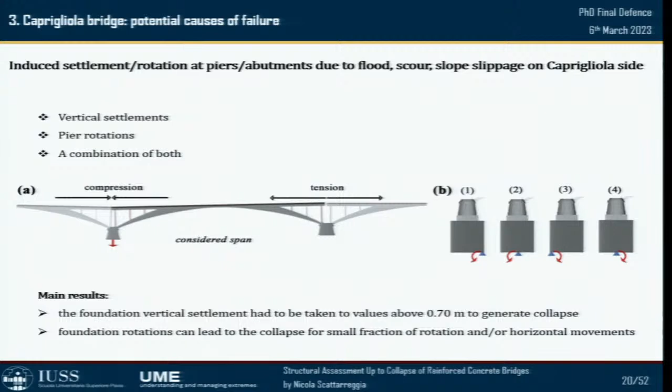I just want to say that it has been observed that foundation rotation as well as horizontal movements would have induced failure of the bridge. Indeed, as you can observe in this slide, by simulating the effects of a slope slippage on the Caprigliola side that was observed, you can see that for just a horizontal movement of around 10 centimeters, there was a concentration of damage at mid-span and in a section close to the pier arch connection. And such kind of damage would have been even more critical with the presence of construction mistakes, let's say, or potential minor modification of the pier arch connection, potentially induced by a modification of the hinge throat. Indeed, this kind of increase of thickness of the hinge would have restrained the rotation and would have easily induced the failure of a section in a bridge span.

And as a result, from a failure from one side of a span, from the Caprigliola side, by implementing a full model of the bridge, it has been observed that such kind of failure would have produced a collapse mechanism in which the final debris configuration would have been aligned with those observed on site. And so after the demonstration that the applied element method is a valuable numerical method for simulating and analyzing the response of such structural typology, as well as its cross-validation with the traditional numerical method, it has also been used to carry out studies about the collapse of the Morandi Bridge.

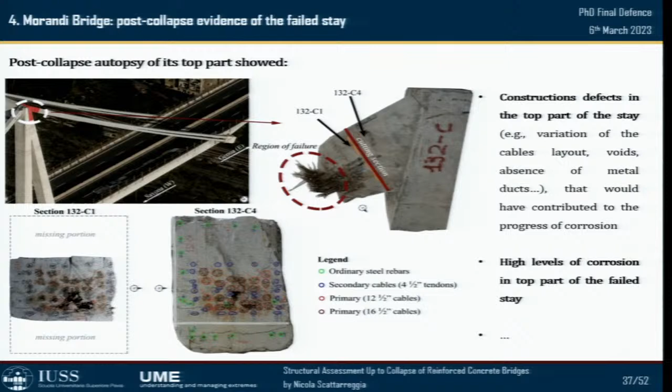However, for the identification of the likely residual capacity, I adopted a back analysis approach for the selection of the likely residual capacity, and this was carried out by comparing the loading scenarios that were experienced in a few months before the collapse by the bridge, and so it was thanks to this approach that it has been defined the likely residual capacity of the stay by considering the loading scenarios that were experienced by the bridge before the collapse.

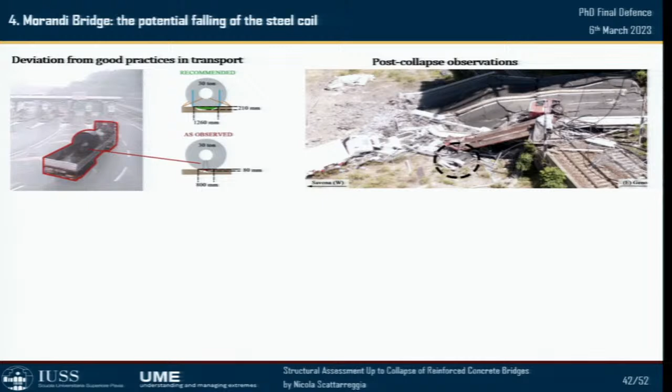And as I said before, one of the hypotheses was that the potential falling of a steel coil would have potentially induced the exceedance of the residual capacity. And I have decided to consider such a hypothesis, considering that the steel coil was not transported according to recommendations, and also according to the post-collapse observation, we have seen that the steel coil was outside the flatbed length of the truck. And even if there is no evidence confirming this event beyond any doubt, however, I want to say that this kind of incidents can occur as observed recently worldwide as well as in Italy. And as also stated by researchers, usually this kind of incidents occur due to the improper securing of these objects

to the flatbeds. And so at this point, a preliminary estimation of the impact force associated to the steel coil impact on the bridge deck, on the connecting span between the balanced system number 9, the one that collapsed, and the other one, has been demonstrated to be, among the loading scenarios recorded at the time of the collapse, the one that would have the potential to induce the stay failure. Indeed, the other ones associated to the presence of traffic loads plus the wind action that was occurring at the time were all loading demands inside the capacity domain. So at this point, considering that this scenario would be the only possible one among the ones considered for inducing the stay failure, additional studies were carried out.

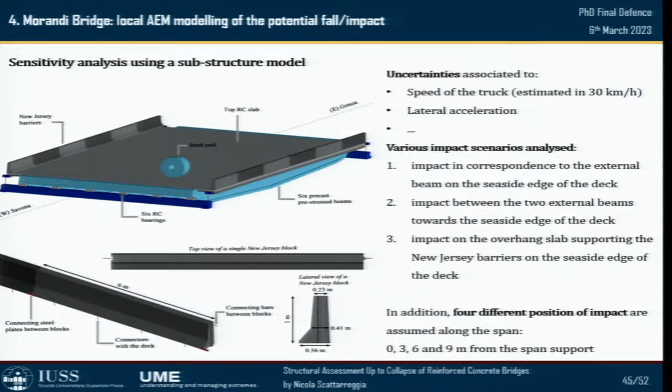First of all, by implementing a substructure model of the impacted span, and many scenarios were analyzed to consider uncertainties related, for instance, to the speed of the truck, as well as the lateral acceleration and exact position of the truck. So we have analyzed different impact scenarios, and at the end of these studies, we found that the worst scenario was the one for an impact in correspondence of the external beam of the simply supported span. So at this point, we have decided also to perform an analysis by using the global bridge system, and indeed we observed that such kind of event would have the potential to trigger the stay failure, and also the debris distribution on ground was compatible with those observed on site.

However, we also considered an additional loading scenario that would have the potential to trigger the stay failure, that was associated to the occurrence of strong thermal gradients within the stay. And I want to note that we didn't know the actual surface temperatures as well as the 3D nonlinear thermal gradients that were occurring at the time of the collapse. However, we observed that such strong thermal gradients would have the potential to induce demand that would have matched the capacity, and this would have also potentially produced the failure of the stay.

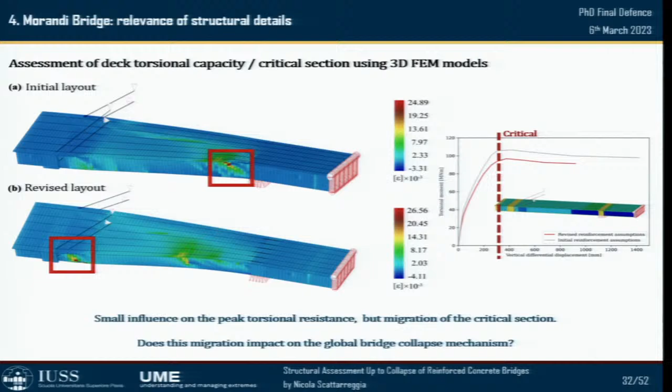Very clear, very interesting. I have firstly a curiosity. The deterioration of the stays is equal in all the 4 points? Have you verified if the same level of deterioration was present in the 4 points of connection with the deck? In one stay, the southeast stay, the one that failed, there is evidence that was observed. There are some water defects. There was a defect that potentially induced such corrosion that was detected just in that part. Environmental conditions, not only the effect of construction.

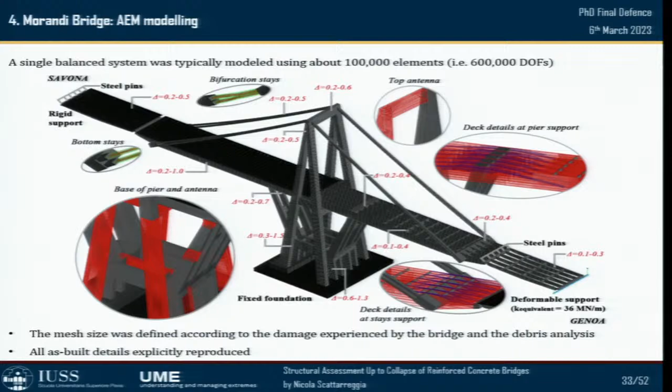And so another, not a question, but I want to ask you if this experience of studying problems after collapses can be useful to avoid collapses, because I hope it is, for you. And for example, in the first example that you analyzed in detail, you can think of an intervention to avoid the problem in the first example, not in the Morandi Bridge, but in the first one.

I think this is an intervention for a similar situation, because it is important to understand from these collapses how to avoid these collapses. Thank you for this observation.

I would say yes. According to our studies, the failure may have been induced both by the presence of slope slippage on one side and by a potential modification of the hinge throat. According to the dimension of the hinge, the rotation is restrained. So if we know that there is this problem, we could simply reduce or increase the hinge throat, and so we can recover the rotation at the constraint.

Because theoretically, this was an isostatic bridge, but in reality we have physical hinges. So if we alter this dimension, we also alter the functionality of the bridge. In that case, if the problem is just related to the physical dimension of the hinge, we should make an intervention to properly define the thickness of the physical hinge.

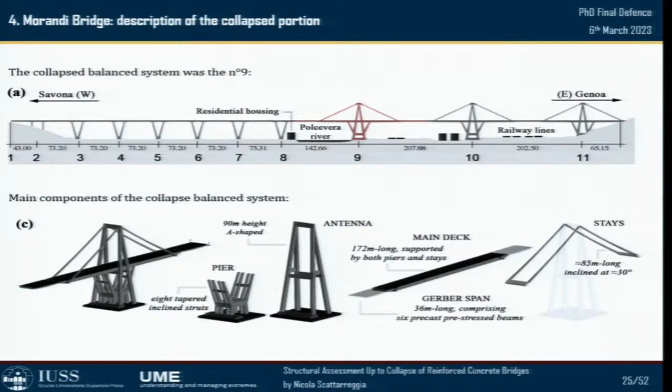I have a question for the Morandi Bridge. It looks like several things played a role and they were superimposed, but I'm really curious whether the collapse would still have happened if the truck with the coil had not passed.

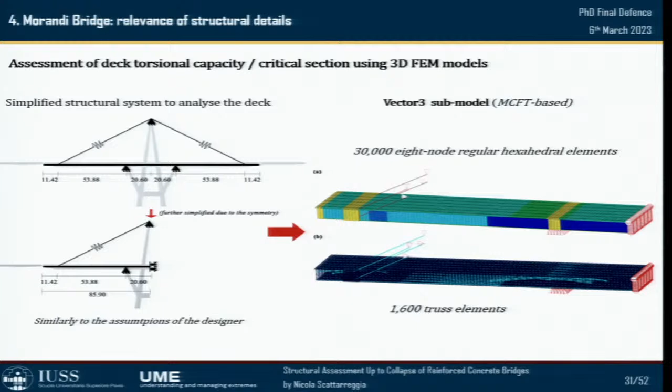Thank you for the observation. That's why we also analyzed another additional extreme loading scenario associated with strong thermal gradients. We don't know if they were present as we considered, but for sure strong thermal gradients would have the potential, in combination with the windstorm that was occurring at the time of the collapse, to produce demands that are very close to the capacity.

This was without the effect of the coil impact. The demand, in this case, is just associated with the traffic loads at the time of the collapse, the wind load, and the presence of strong thermal gradients. So the resulting demand from this scenario would also have produced a demand very close to the capacity.

Well. Thank you. We can accommodate. Can you move up here, because we only have one microphone?

Very nice presentation. I have a few questions, but they're very short. You mentioned a few times for the case of Genova the storm. I was curious about the availability of data in terms of demand, wind velocity, and whether there are any time histories that you were able to apply to your model. That's one question.

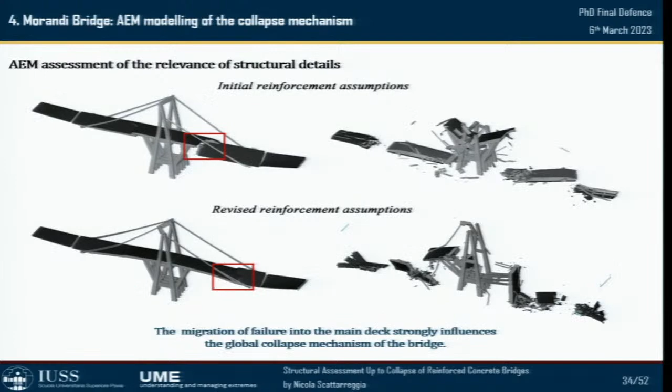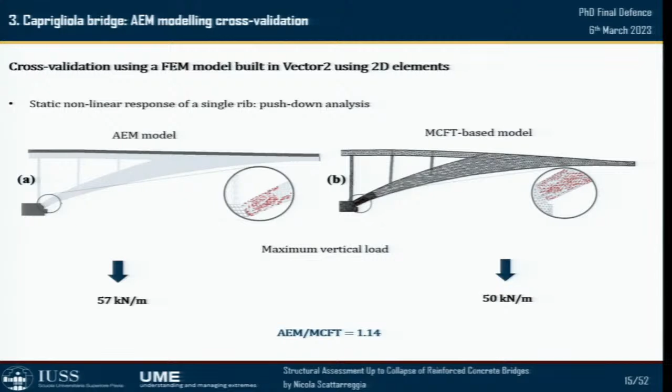And for what concerns the computational time, yes, the applied element method is very efficient. If you remember the Caprigliola bridge, where I showed the comparison between the applied element model and the one built using 2D finite elements, performing the analysis over 3 construction stages took just 15 seconds or so for the applied element method, whilst it was around 2 hours for the finite element one. So there is a huge difference between the two modeling approaches, and at the end the results are well aligned. So I think there are many pros on the applied element side.